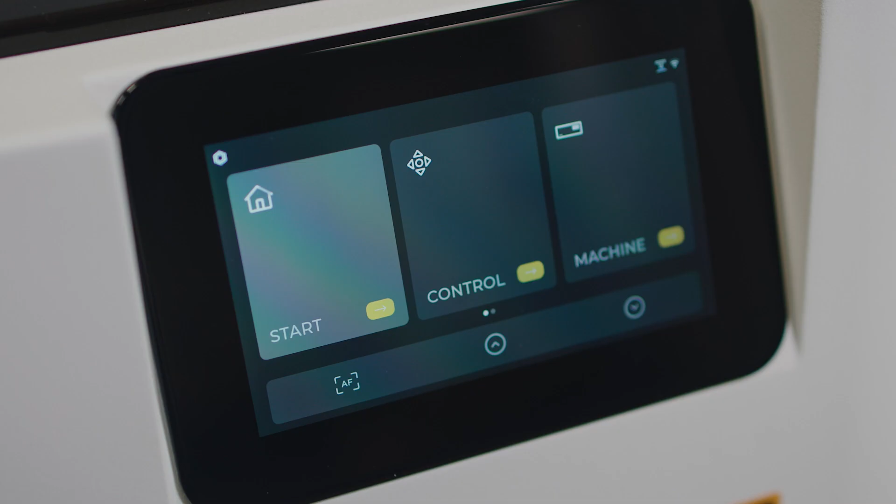Let's talk about the Flux Ador itself. It has a metal body, also a bright LED touchscreen, a safety switch located on the outside of the unit, an autofocus feature, as well as a camera located under the lip of the unit that gives you a bright, full color view of your workspace. This unit does need to have a filtration unit or be vented outside.

Before we take a look at our samples, let's talk about some of the limitations when it comes to a diode and the material you can use. You cannot cut or engrave anything that has a clear acrylic or anything that has a translucent hue to it, glitter, or fluorescent. Preferably, you would want a material that is dark in color and 100% opaque.

Let's talk about what materials you can use. For example, I have our marble and acacia wood cutting board. We also have a bag tag made out of the Rowmark 2-ply engravable plastic, a cork trivet. We also have a leather keychain, an anodized lighter. This is from the Saddle collection. And these tumblers are from our Simply Engravable holographic line.

Now let me show you how to set up the rotary and create one of these tumblers.

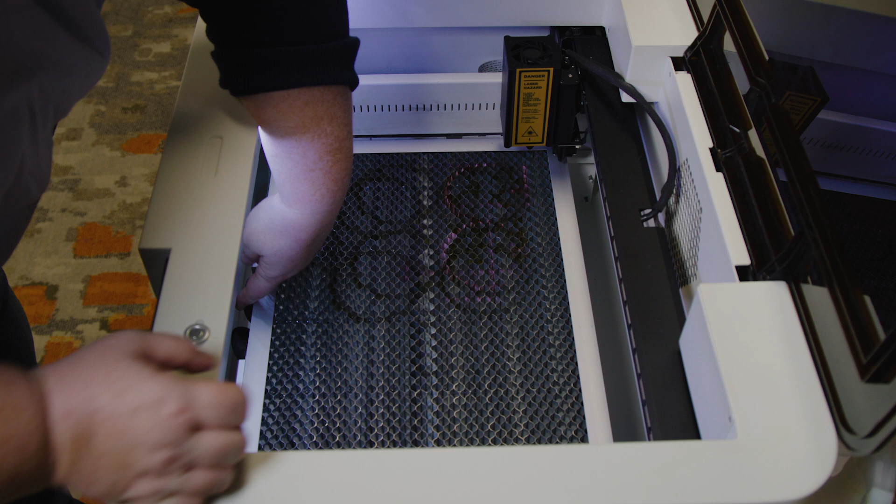Okay, to get our honeycomb set up for our rotary, since we're going to engrave our tumbler, we do need to lower it. There is a little handle here on the front of the honeycomb. I'm gonna go ahead and grab that and lift up, move this down to the bottom pegs, and make sure my honeycomb is then sitting level on all 4 of the pegs.

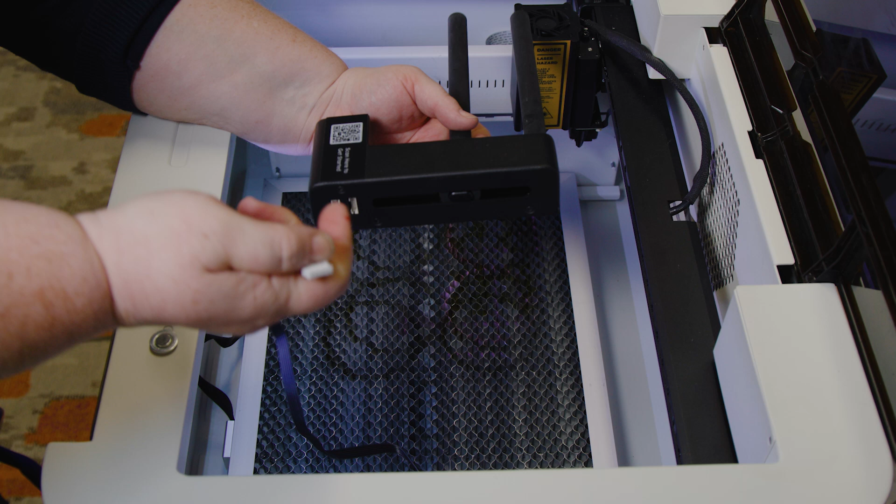To install the rotary, I've already ahead of time installed my rotary cable. There's a phenomenal video on the Flux website that goes into great detail on how to install that. I'm gonna go ahead and plug my rotary in, tuck my extra cable back, and set my rotary here in the middle of the bed.

I will need my tapered piece since I'm doing a tapered tumbler today. And I will also need my magnetic mug tumbler stop that will help my tumbler keep from rotating off of my rotary. So to start with, I have my tumbler here.

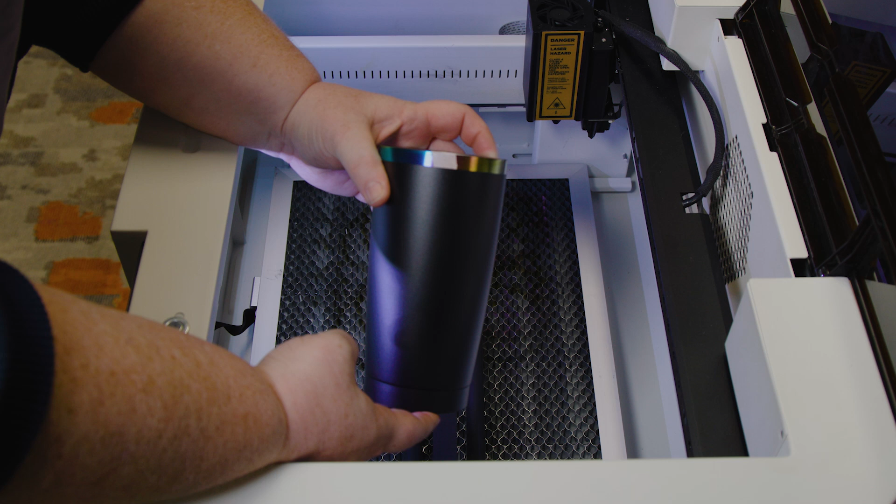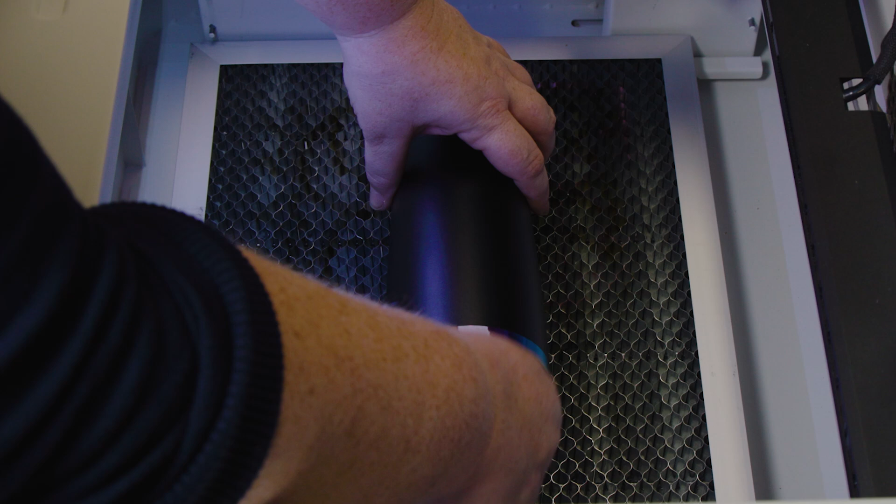I have gone ahead and taken a piece of masking tape and marked the top layer here where I want that to be the center of my tumbler. I'm just gonna go ahead and get this set up here in the middle. Get my end piece holding my tapered end in place.

And I want this pushing up against this magnetic stopper so that what that does is stops a tapered piece from rolling off of these rollers as it rotates. So I'm just gonna go ahead and spin it around here and just check to make sure it's rotating okay, because I do want this to be level. All right, looks like it needed to be tightened up just a little bit.

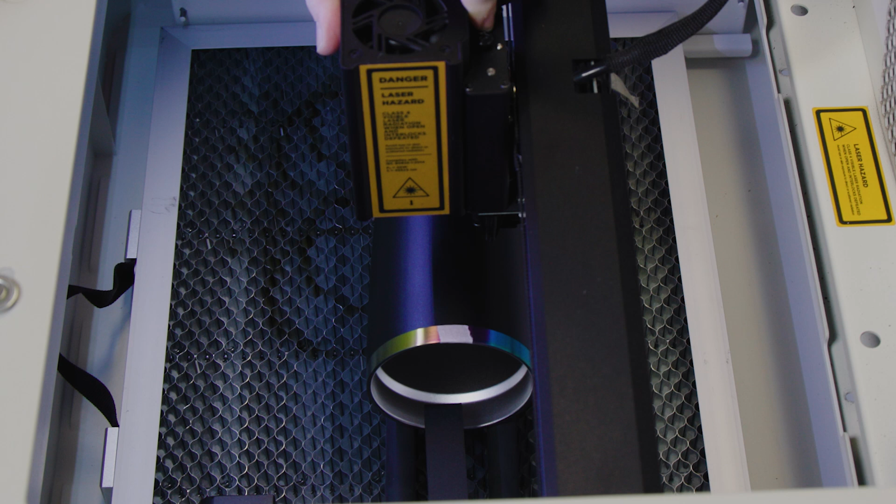To autofocus on my tumbler, I want to bring my laser head over. I want to make sure the point of the autofocus, which is here on the back, is just over the tumbler. And in the center, I'm going to hold my autofocus button down and focus on my tumbler.

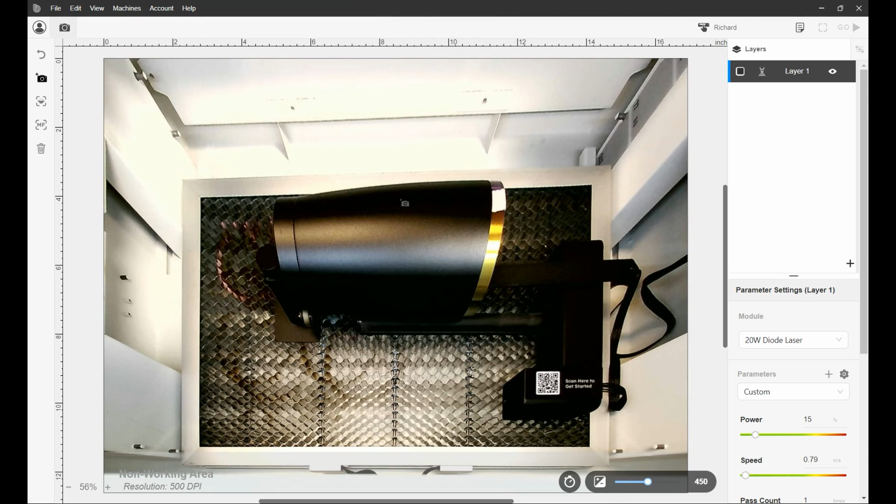Now that we have our material installed, we can go ahead and take a picture of our bed. And this is where you can see with that fisheye lens camera that this is going to look slightly distorted. It's why I'm using that masking tape to help mark the middle.

So when I turn on the rotary under my document settings, and turn on my rotary, I'm going to get a blue line. That blue line is what my design is going to rotate on. So I just need to move it so that it's over the middle of my tape. Move it just slightly so it's over the middle of my tape.

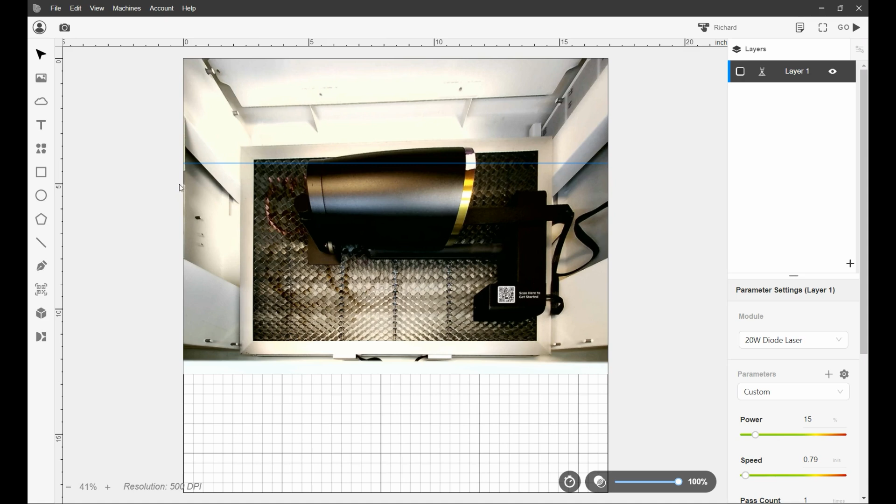And then when I bring my design in, which I'm going to go ahead and import now, I'm going to bring it in under laser. It did come in with a white layer, so I can go ahead and turn that off and just be left here with my black design, which I'm going to go ahead and change into a brighter color, something a little easier to see. So now I can go ahead and rotate my design.

Since this tumbler is in here, I'm going to go ahead and rotate it, and you can see this blue line is now lining up with the blue circle on the top of my design. I do want to scale my design down just a little bit.

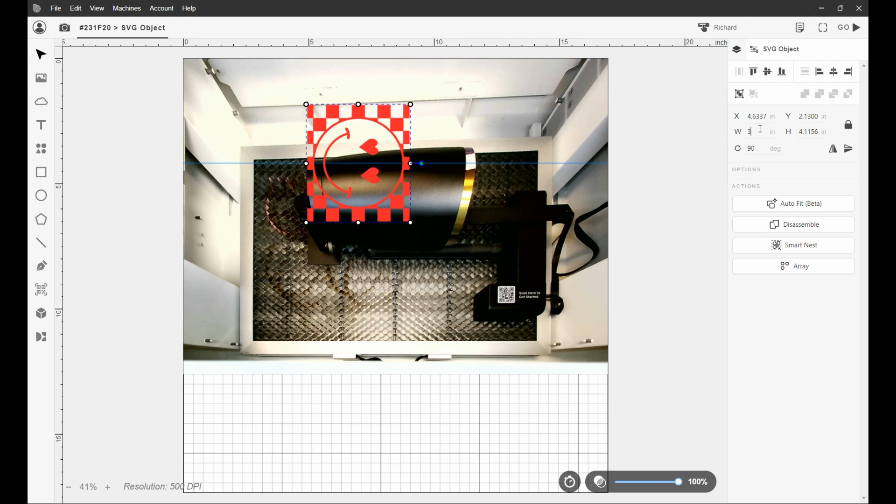I'm going to scale it down to 3 inches, about the size of a logo, and then I'm going to go ahead and just put my design here on my tumbler. I want to go ahead and make sure my blue circle again is on my blue line. That is the center of what my design is, so that way then it's going to rotate around that.

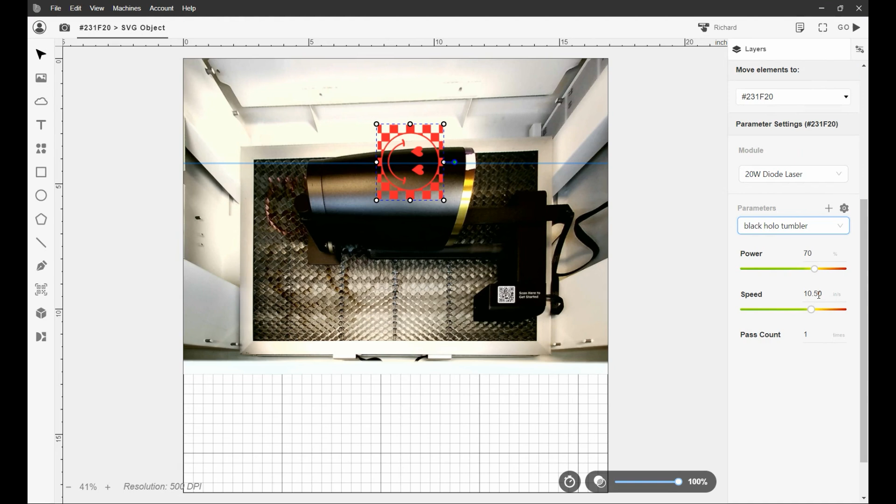All right, and now I just have to go ahead and go with my settings. So I'm going to come down here to my parameters. I'm on my 20-watt diode, and then instead of going to custom, I'm going to come down to a setting that I've already created in here called Black Holo Tumbler. So I'm going to be at 70% power, and my speed is going to be 10.5 inches per second. Then I can go ahead and just send my job.